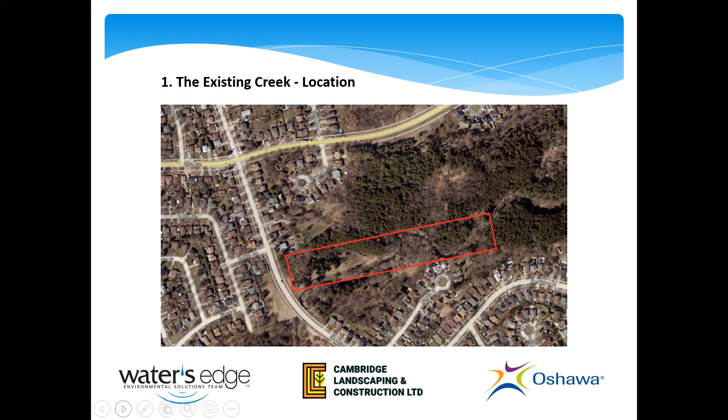Part 1, the existing creek. The existing creek location. The figure shows an aerial view of the Farewell Creek location, and the rectangular box highlights the project area along the creek. The existing creek problems. Part A, the failing retaining wall. The figure shows the Farewell Creek, the slopes, and the failing gabion retaining wall.

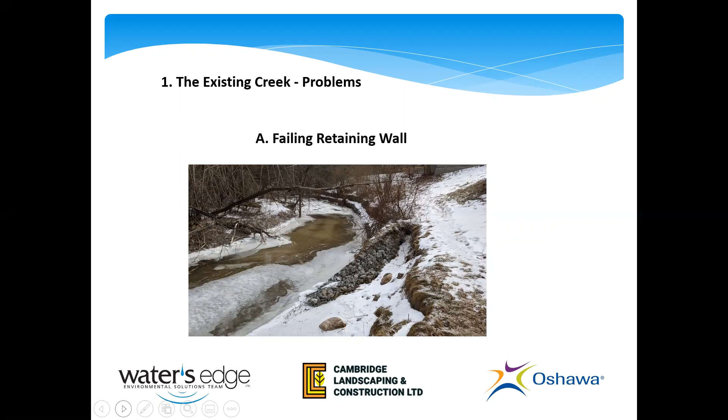Background studies Part A, the Palmer Report. This report was completed December 31st, 2016, and examined the entire stream reach from Grandview Street South to Townline Road. This report identified eroding banks and failing gabion wall, then assessed 4 different options: to do nothing, to replace the gabion wall, to implement a vegetated boulder revetment such as rocks and plants instead of a gabion wall, or meander realignment of the creek.

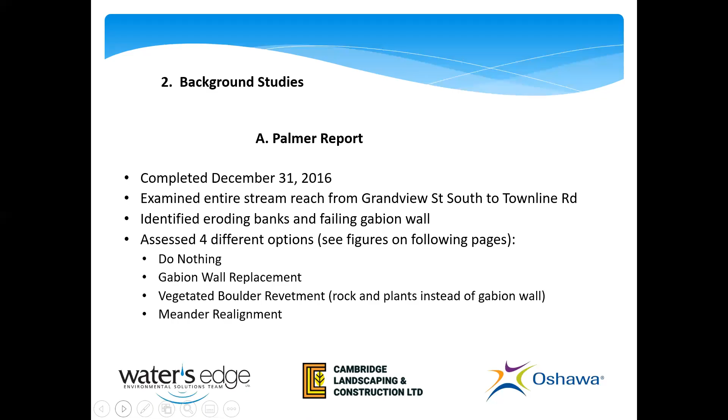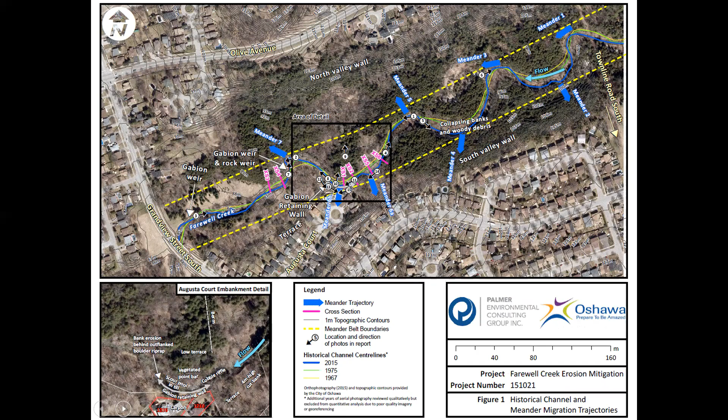Background Studies Part A, the Palmer Report continued. This figure contains an aerial map of the Farewell Creek with key features highlighted, such as the contour lines, labels of the creek flow, and boundaries, meanders, and features of interest. Background Studies Part A, the Palmer Report continued. This figure shows diagrams of the Farewell Creek cross-sections under Proposed Alternative 1, to do nothing, and Alternative 2, gabion wall replacement.

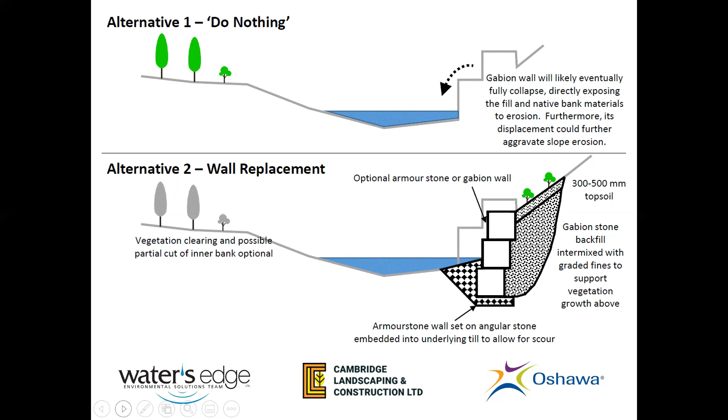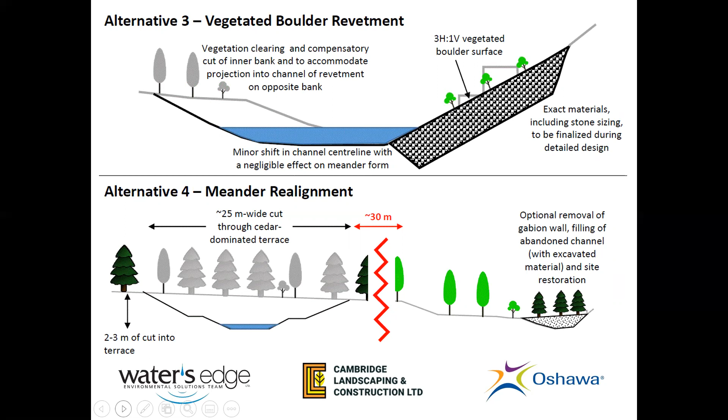Background Studies Part A, the Palmer Report continued. This figure shows diagrams of the Farewell Creek cross-sections under Proposed Alternative 3, a vegetated boulder revetment, and Alternative 4, meander realignment. Background Studies Part A, the Palmer Report continued. The Palmer Report included Alternative Number 4, meander realignment. Further details are shown on the following figure.

Background Studies Part A, the Palmer Report continued. The figure shows an aerial view of the Farewell Creek with the existing flow path highlighted and the location for the proposed meander realignment indicated. The proposed meander realignment moves the Farewell Creek away from the Augusta Court embankment.

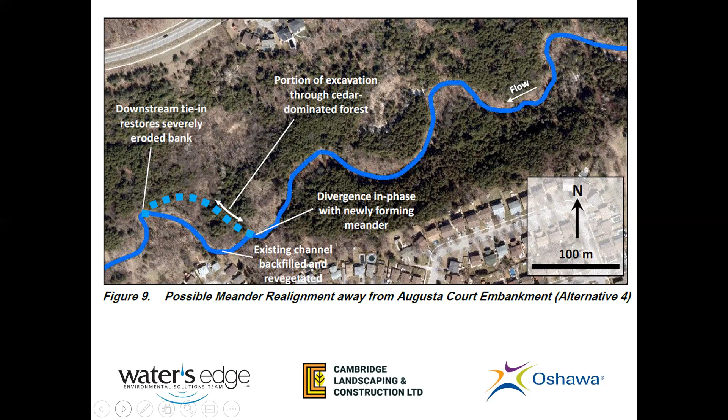Background Studies Part B, the GHD Report. Titled Farewell Creek Watercourse Improvements, Scoped Environmental Impact Study. This report was completed August 17, 2020. The report documented existing terrestrial conditions in support of a realigned channel. Specifically documented were the vegetation communities, shown on the following figure, a tree inventory indicating 188 trees to possibly be removed, a study of breeding birds, which have a breeding window of April 15th through August 15th that must be respected during construction, and species at risk, none of which were found.

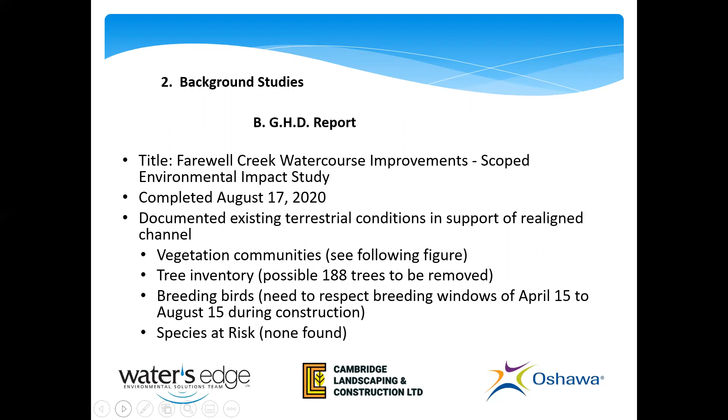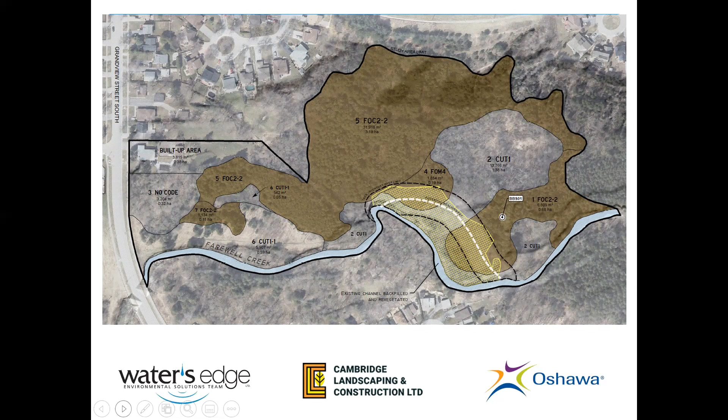Background Studies Part B, the GHD report continued. This figure shows a map of the Farewell Creek region and vegetation communities within. Part 3, the study process.

The study process. Changes to the design requirements. The city developed a new fifth alternative, based on Palmer's Alternative 4, meander realignment. The fifth alternative includes the eroding bank located at meander 7 on the Farewell Creek. The exact location of the realignment and tie-ins to the existing channel are to be determined during the design phase and are the responsibility of the design-build team.

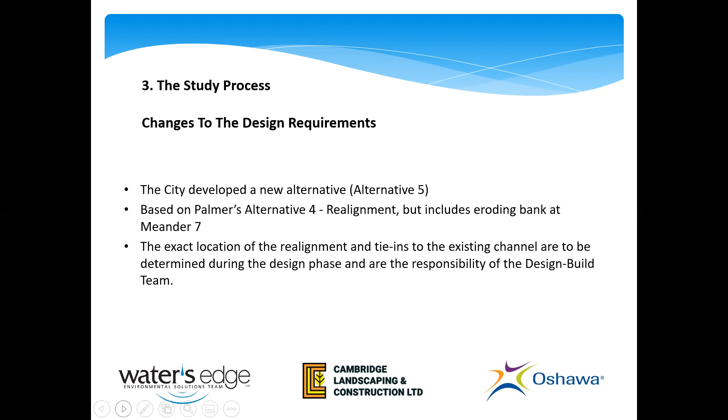The study process. Key steps of the process are as follows. A request for proposals, which is now completed. Project award to CLCL, which is now completed. The design by Water's Edge team, now in progress. Approvals by the review agencies, coming this fall and winter. Construction by CLCL in the summer of 2022. And finally, monitoring by Water's Edge team for 3 years following construction.

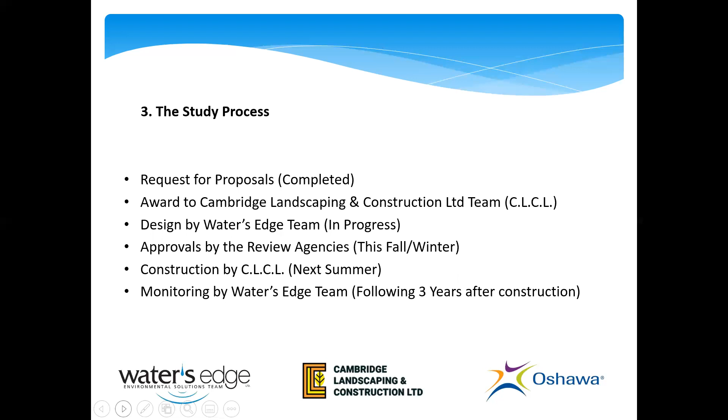Part 4, the concept design. Concept design, design basis. The design basis is to protect the private properties by realigning the creek, to enhance aquatic habitat by creating a stable creek, to reduce bank erosion by creating stable slopes, to reuse existing wood and stone in the design, to avoid off-site removal of any material, and to tie in to the upstream and downstream ends based on site needs.

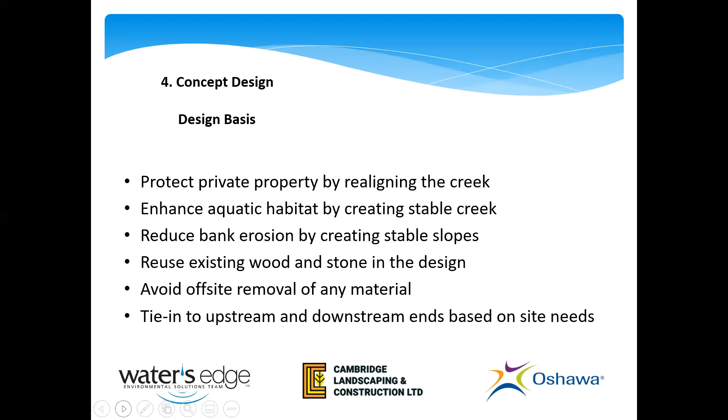Diagram 1 of 8. This diagram is an engineering drawing showing the plan and profile views for the creek realignment. The concept is a meandering realignment of Farewell Creek away from the existing eroding banks and the failed gabion wall. The length of the new channel is about 225 meters. The concept shows 6 riffles and 5 pool structures.

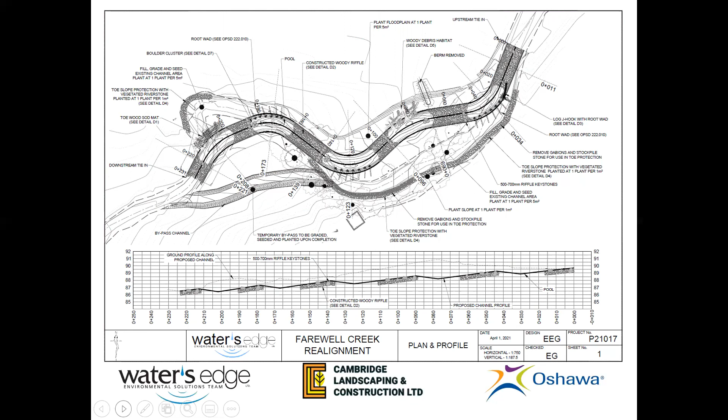The concept will include the placement of root wads, woody debris habitat structures, riffle keystones, the removal of the gabion basket wall, and the grading of existing eroding banks. A temporary bypass channel is also shown in the diagram. Diagram 2 of 8. This diagram is an engineering drawing showing 9 cross-sections of the creek realignment.

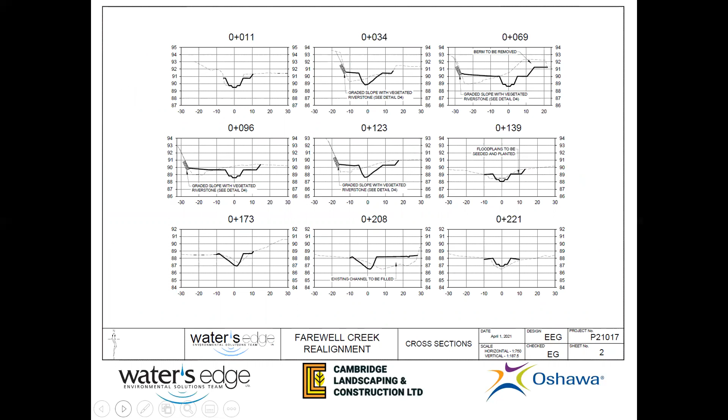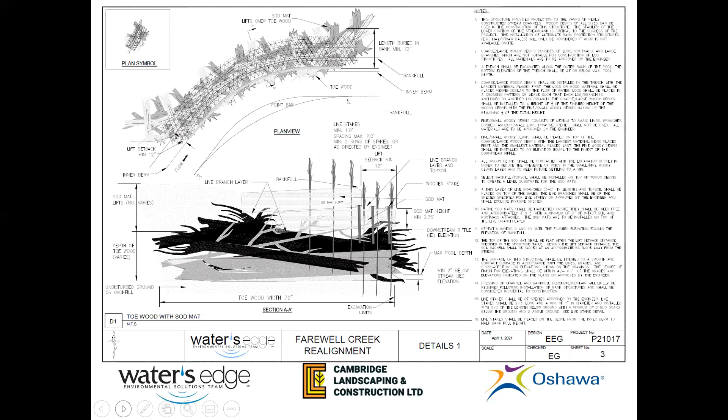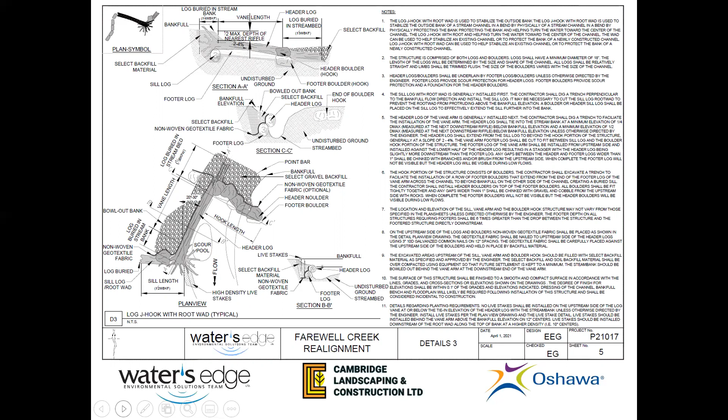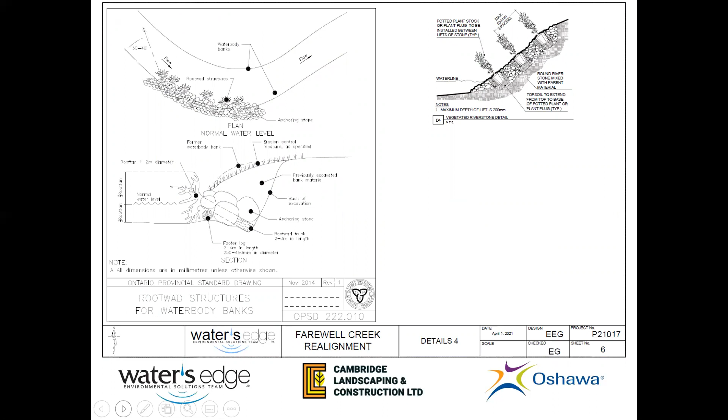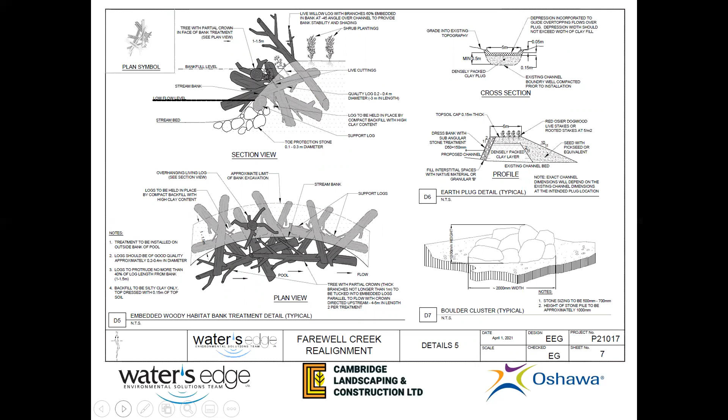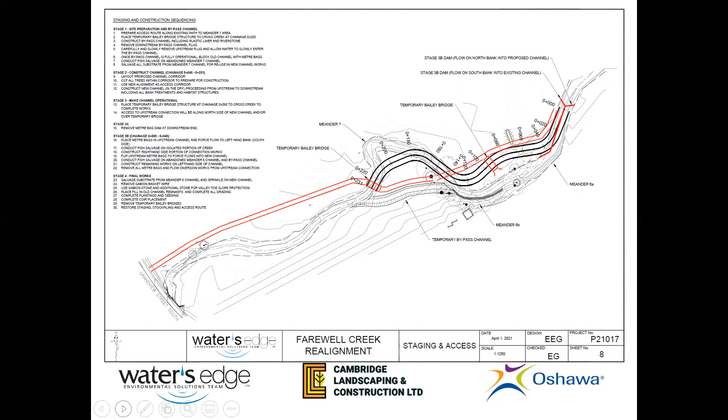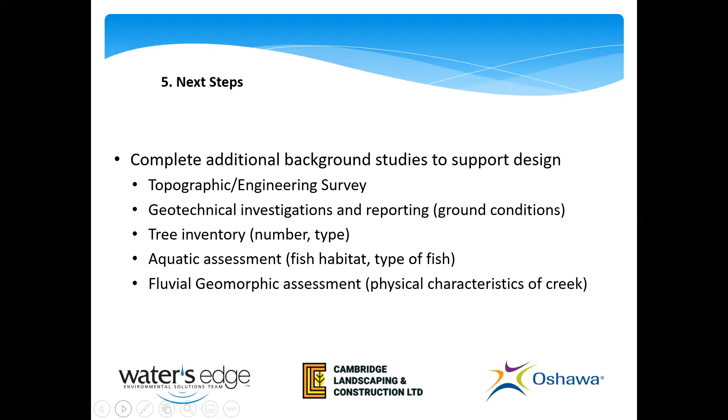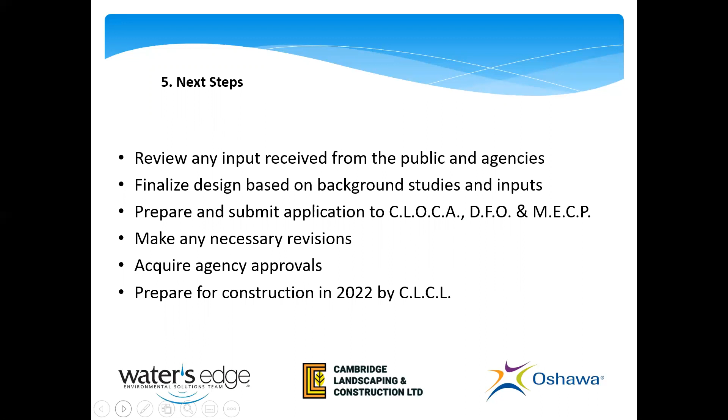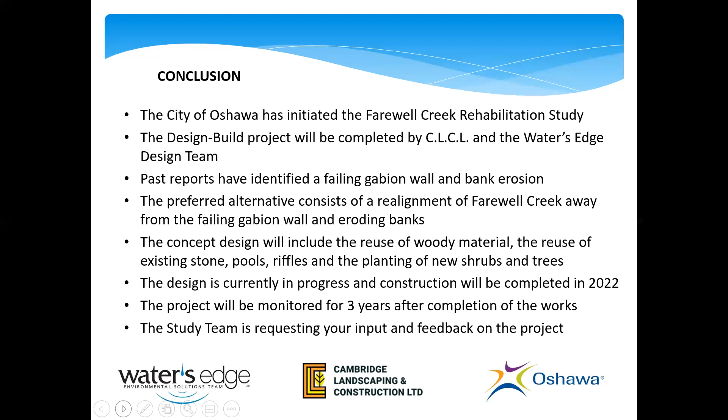This presentation has been prepared in lieu of an actual public meeting during COVID. You may still have questions and suggestions. We would like to hear from you.